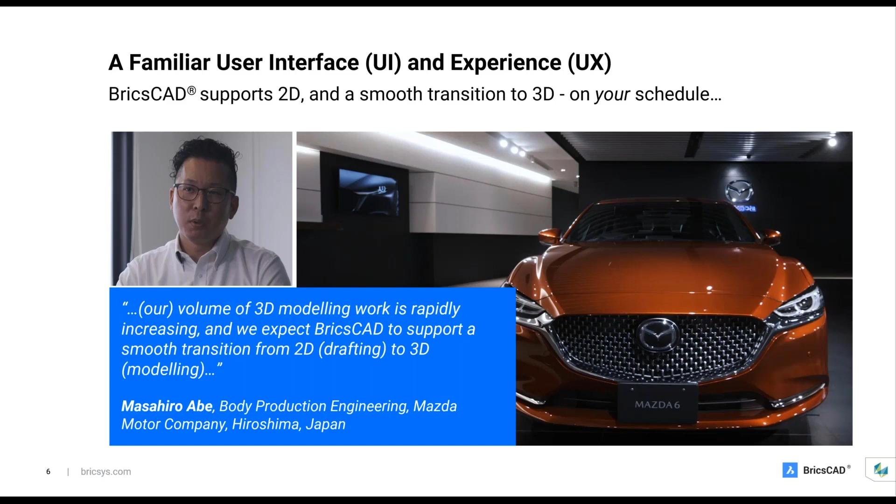Does this look familiar? Well, it goes much deeper than it looks. High compatibility means that AutoCAD users can be comfortable in BricsCAD in 1 hour and proficient in an afternoon. The user interface looks very familiar right out of the box, and you can modify it to suit your every whim and need. But perhaps more importantly, the user experience is the same. As my friend Robert Green says, never forget what you already know. The same workflows, the same terminology, the same support files, 100% compatible command structures. It's pretty amazing, and BricsCAD is exceptionally comfortable for everyone.

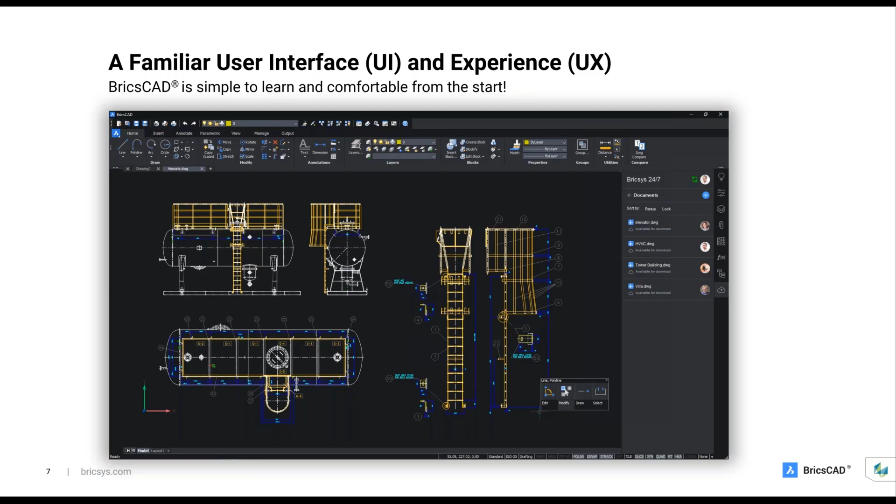Now, what are the folks at Mazda so excited about? Well, the fact that the BricsCAD product family supports 2D drafting, 3D modeling, building information modeling, and mechanical assembly design in one product with a single workflow. We call this full stack product BricsCAD Ultimate. The 30-day free trial of BricsCAD is BricsCAD Ultimate. So when you download and try BricsCAD, you're getting all the products in one package. Your trial installation becomes a full commercial license when you enter a valid license key.

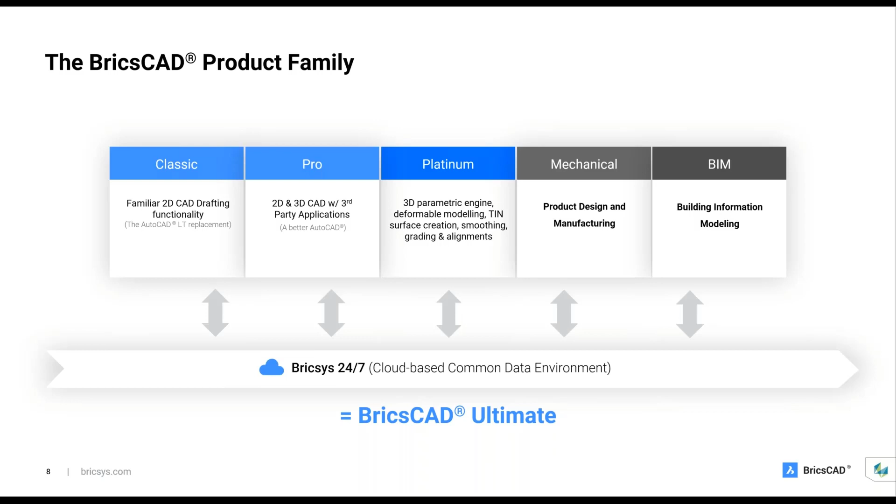And all editions of BricsCAD link directly to Bricsys 24/7, our cloud-based collaboration and data storage environment. There's an in-product communication panel for 24/7 in each one of the BricsCAD editions. From that panel, you can communicate directly with your colleagues, view, download, upload, and version files through the Bricsys 24/7 cloud service.

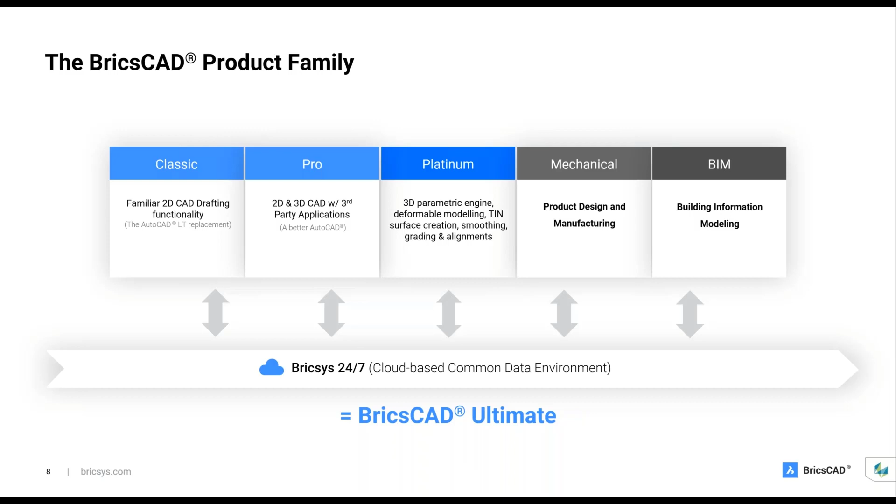When you leave this session today, we want you to remember 3 things. Here's the second thing: BricsCAD is a development platform. It's a modern and powerful CAD engine supporting over 400 world-class application products.

The BricsCAD runtime extension, BRX, is code compatible with Autodesk's AutoCAD runtime extension, ARX. This application programming interface lets developers write code in C++, C#, .NET, and Lisp. If you write applications for AutoCAD, you really need to check out BricsCAD's BRX. And if you use CAD applications, you really need to check out BricsCAD, as there are more than 400 industry-specific application programs on the BricsCAD App Store.

So let's hear from our next customer, Stageco of the Netherlands, and I'll ask Julie to come on after and tell you a little bit more about their use of BricsCAD.

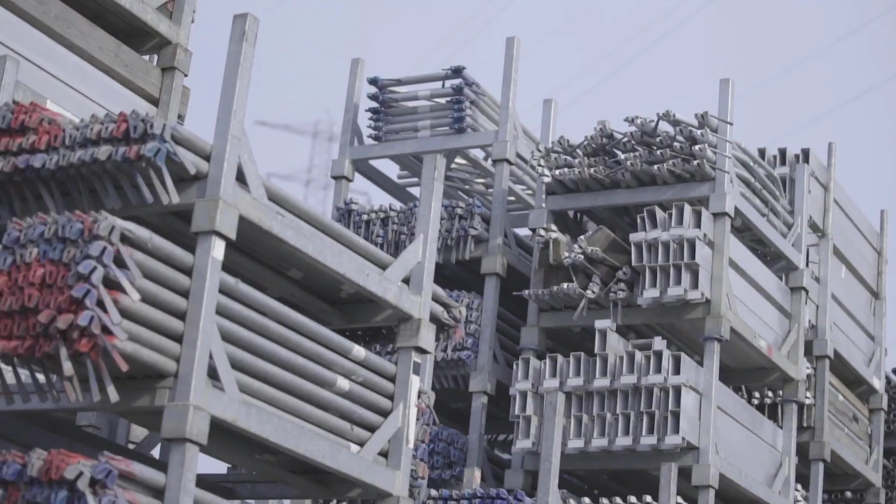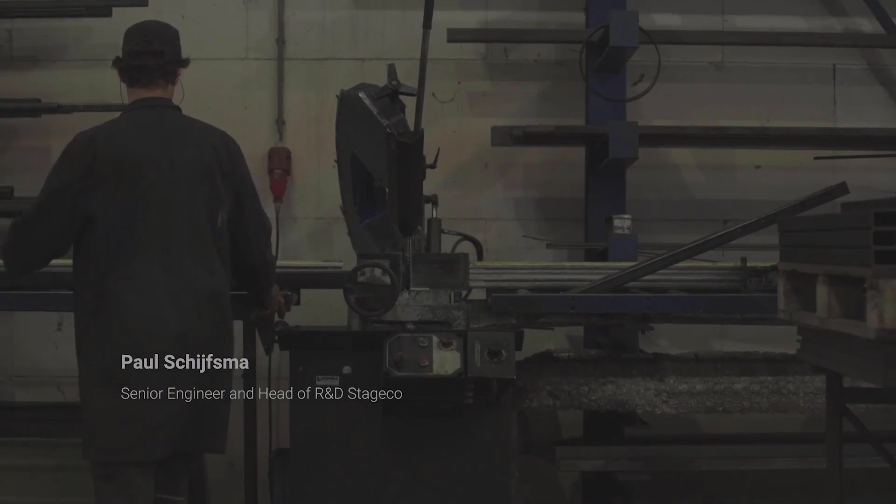My name is Paul Schijfsma. I'm Senior Engineer and Head of the R&D Department of Stageco Netherlands. We build stages for big tours and festivals. For a company like Stageco, it's very important to own your own software and CAD licenses, because there's so much relying on the drawings, there's so much relying on the whole CAD system. From just the simple drawings, which are the first indicator of what a construction is going to cost, until load lists and the drawings for the people who have to build the structure.

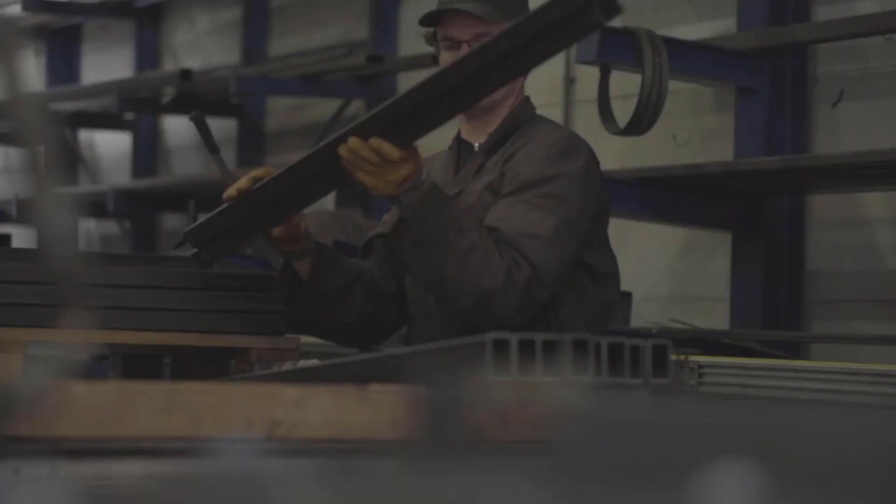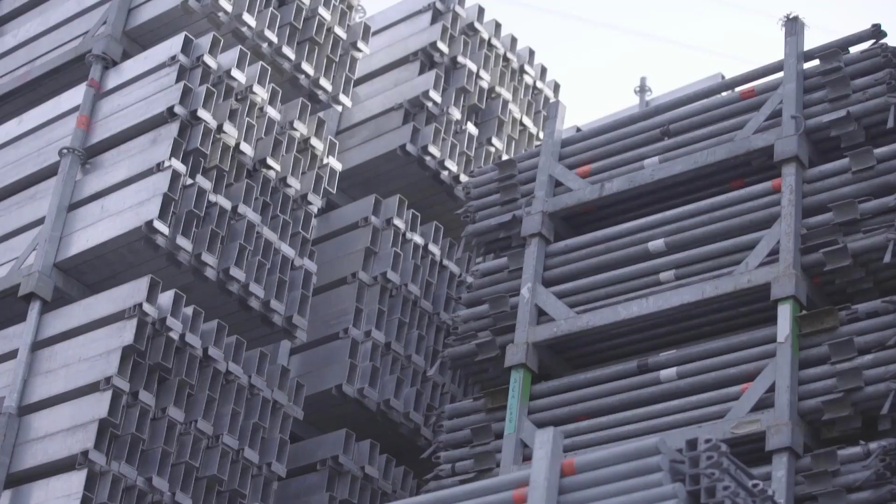BricsCAD is most important in our work because of its functionality, the speed in which it works, the speed in which you can see all the aspects of the drawings. Definitely a big time saver. We've had CAD programs in the past which were also DWG based, and when you have a large drawing, because we do pretty large constructions with a lot of parts, and when you then want to rotate or zoom in or zoom out, you just have to wait again and again.

And the structure is pretty open, the program is pretty open to make your own applications for your specific needs. Besides the speed that BricsCAD brought us, it also brings a big advantage in the Dutch event industry, because there's a company in Holland which has made a shell around BricsCAD, especially made for the event industry, which also has a lot of libraries, like libraries with light, with scaffolding, with PA, with video. So it makes it very easy to exchange drawings or to upfront see where problems are going to occur.

My name is Paul Schijfsma, but now I'm known as the guy who brought in BricsCAD at Stageco.

Here's what Paul Schijfsma, Senior Engineer and Head of R&D from Stageco, says about the power and application programs that run on BricsCAD. As he said, there is a company in Holland that makes a program for BricsCAD especially created for the events industry. It has libraries for lighting, scaffolding, PA, and video, so it makes it very easy for us to exchange drawings and upfront see where problems might occur in our design.

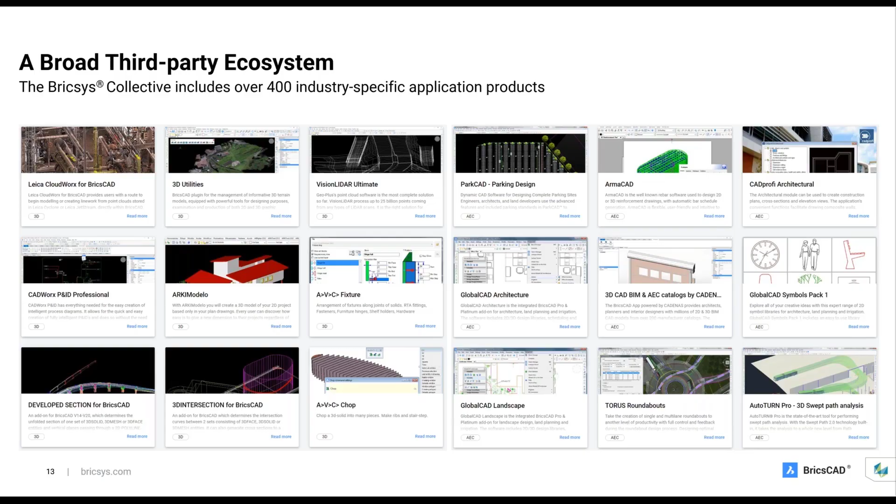When you leave this session today, we want you to remember three things. Here's the third thing: BricsCAD delivers an all-in-one workflow for 2D drafting, 3D modeling, building information modeling, and mechanical design. This means a manufacturer of architectural building products doesn't need to change their software to integrate BIM and manufacturing. Intrigued? Meet our customer, Prototyp.

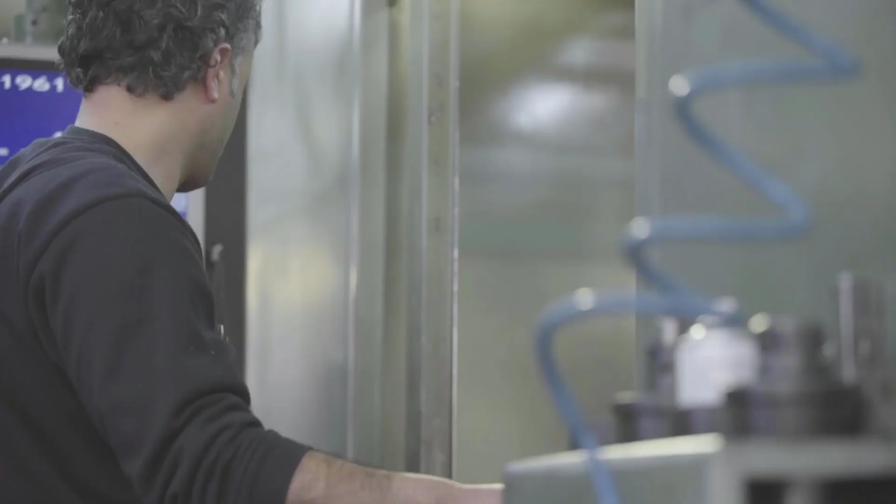My name is Christo Genchev and I'm Managing Director of Prototyp, a facade engineering office. BricsCAD covers all of 2D and almost all of the 3D tools you need. It combines features from almost all software packages that we use, and integrates them in one software product.

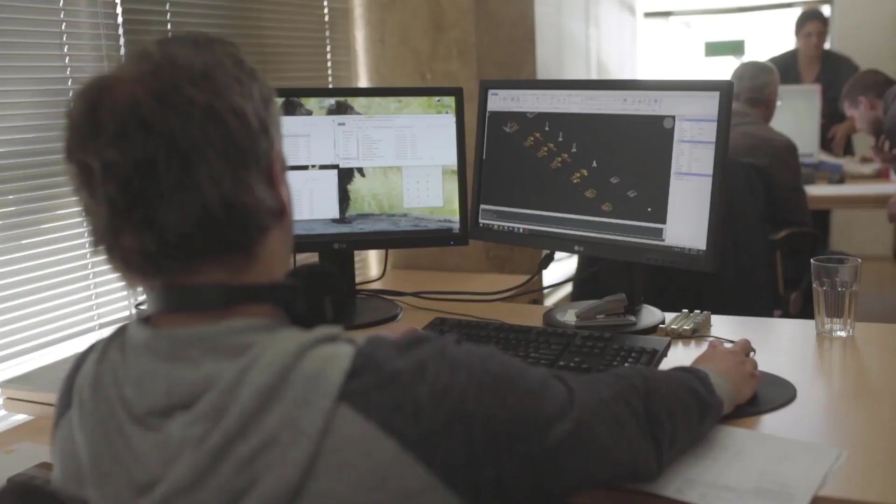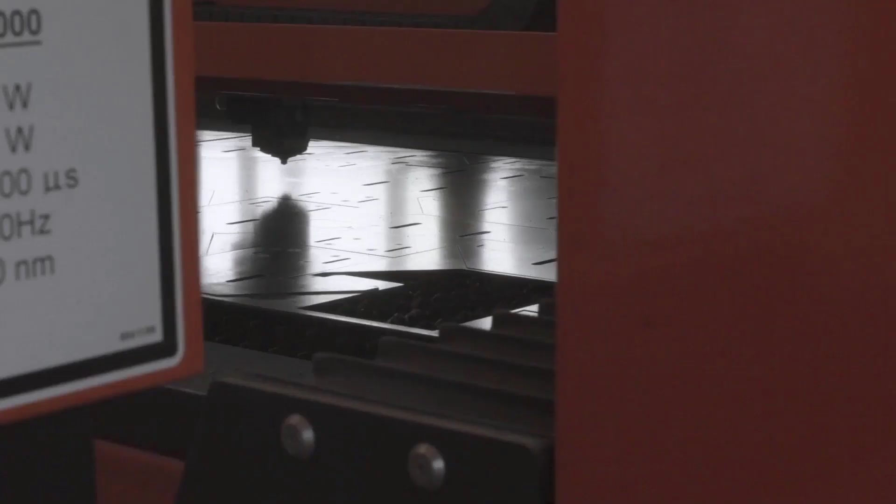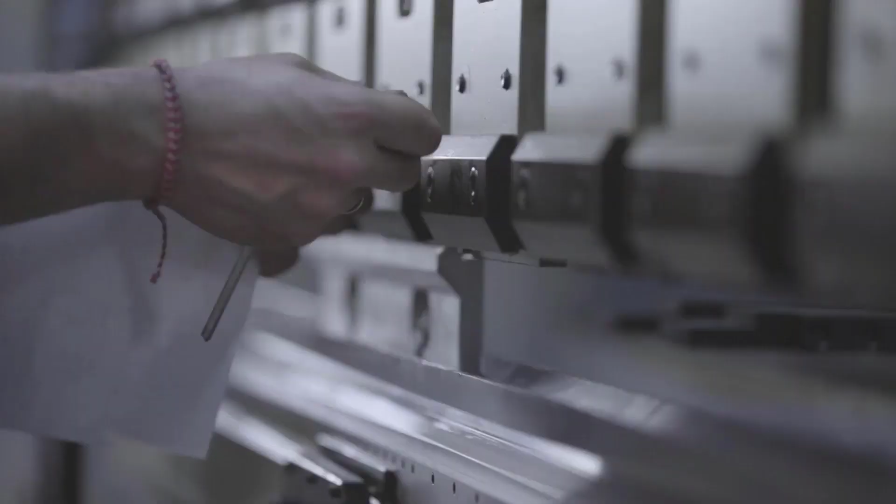It uses a very widespread data format, DWG, which is the de facto standard in the CAD industry. And since we work in the construction industry, you're able to create BIM models, which is something we need more and more often in our job. But what distinguishes BricsCAD is, of course, the sheet metal module, which is very helpful.

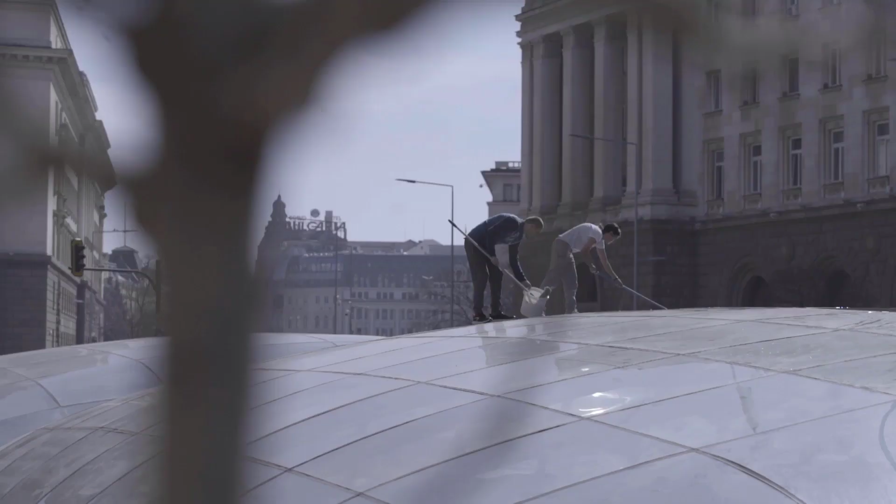Engineers are not determined by the tool they're using; they're determined by what they know. In some cases the 3D path is more productive, and in some cases the 2D path is more productive. If you're an engineer used to working in 2D, it's much easier to start working in 3D with BricsCAD than with any other tool, because you follow the same pattern. This is one of the good things, that you keep everything in one format.

We want to be convinced every year by our supplier why to buy the new one. It's a more equal partnership with the provider of something as important as your software. This is why we like to have software that we really purchase.

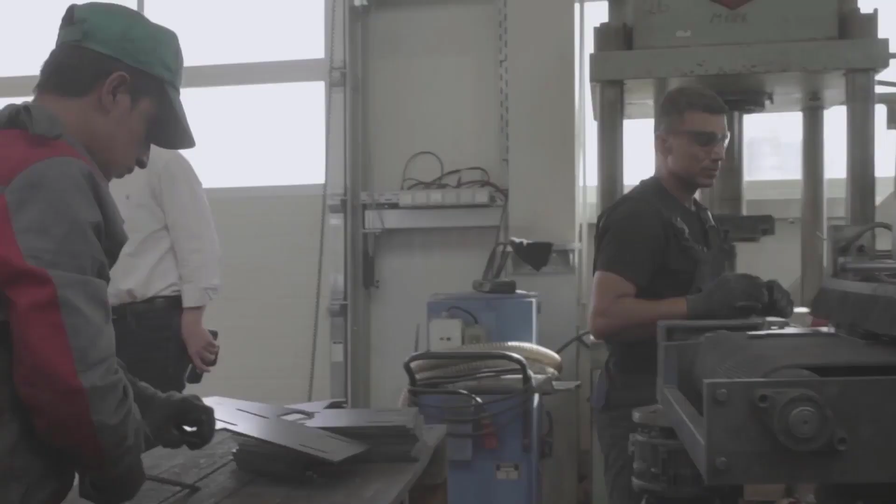Hristo's team at Prototyp uses 85 licenses of BricsCAD Pro, Platinum, and Ultimate. As I said earlier, BricsCAD Ultimate includes both BIM and mechanical workflows. So imagine producing manufacturing-ready documentation from a 3D BIM model - you can with BricsCAD Ultimate.

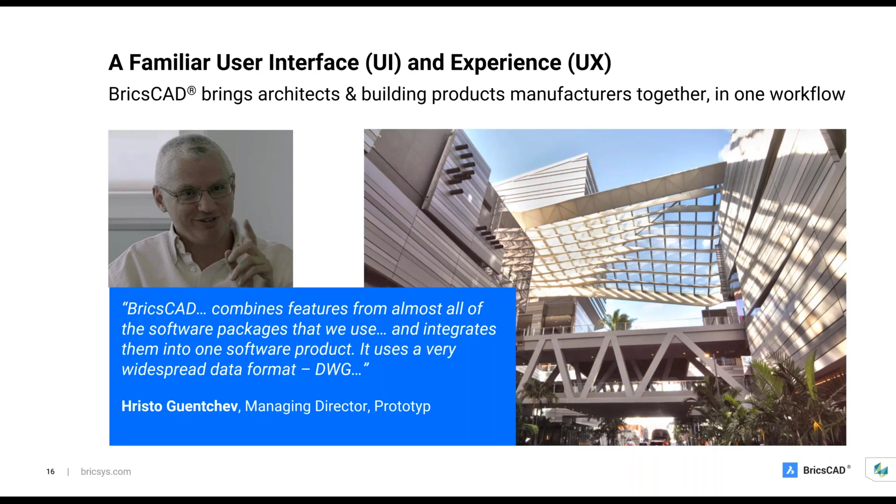One more thing, something Hristo said that links back to the earlier story. I'll quote him: in some cases the 3D path is more productive, and in some cases the 2D path is more productive. If you're an engineer used to working in 2D, it's much easier to start working in 3D with BricsCAD than with any other tool, because you follow the same intuitive pattern. High praise indeed. And speaking of BIM, since Mr. Guentchev mentioned it,

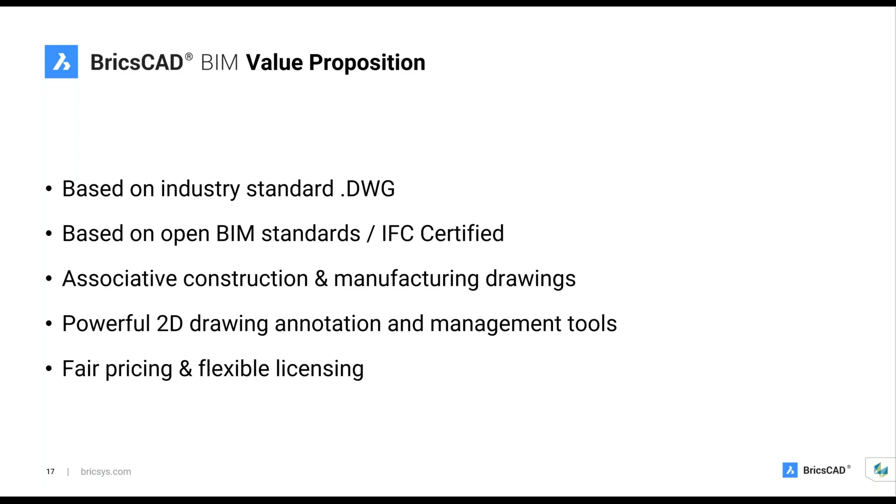we offer an alternative building information modeling workflow that's turning heads today in the industry. Our workflow is based on industry standard DWG for interoperability and lower training costs. We're based on open BIM standards and IFC certified by Building Smart International. Now you can create associative construction and manufacturing drawings with the most complete 2D drafting toolset ever, and potentially best of all, fair pricing and the most flexible licensing in the industry today.

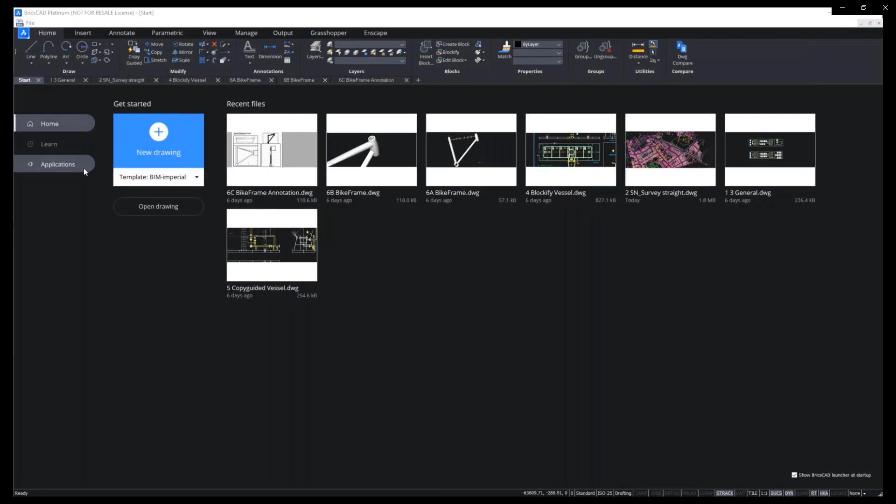BricsCAD is highly compatible with the user interface and user experience that AutoCAD users know and love, so it's easy to learn. It comes predefined with workspaces for drafting, modeling, mechanical design, and BIM. The user interface looks very familiar, and it delivers all the information you need to be productive right away.

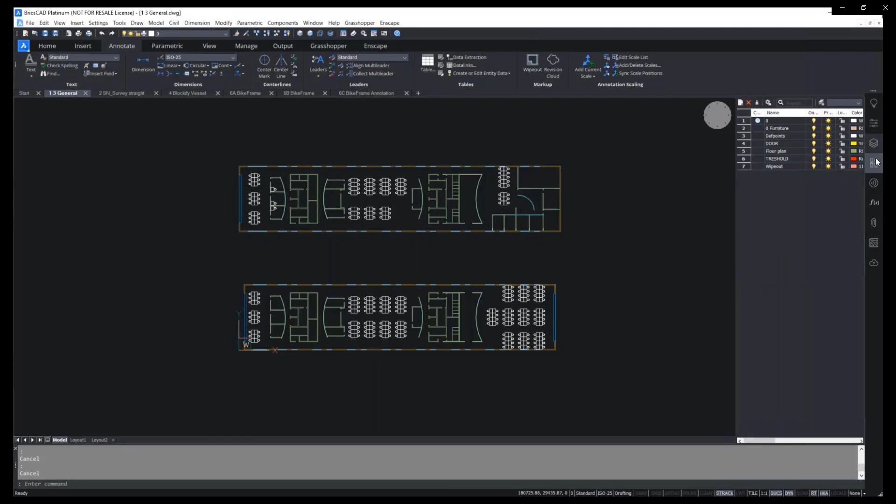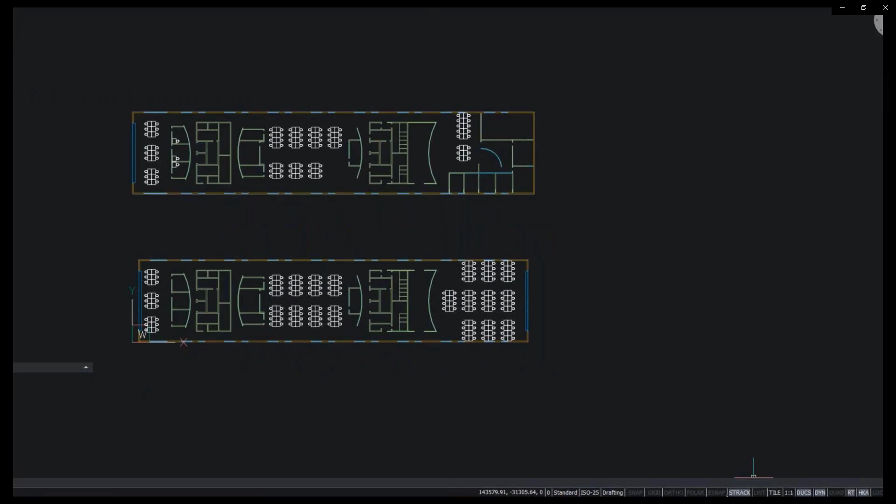Dockable panels by default are displayed along the right side edge for properties, layers, customized tool palettes, our 24/7 cloud service, and more. The command prompt layout is fully adjustable to meet your working style - it can even float. The layout tabs are where you'd expect, and we've added a layout manager to help you create and organize your layout tabs. BricsCAD's familiar status bar lets you control those workspaces, as well as tracking and snap settings and much more.

Now here's the most important part of the BricsCAD user experience: command names, aliases, and system variables are the same in BricsCAD as they are in AutoCAD, so you don't have to relearn anything to use BricsCAD today.

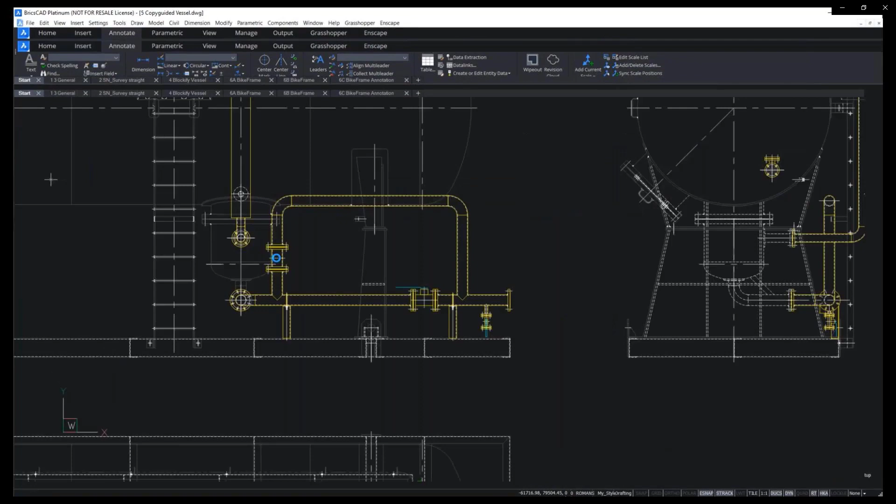And your drawings are totally compatible. Just open them and go. Remember, they are DWGs. There's no need to change your drawing templates, blocks, page setups, printer setups, or sheet set layouts to move to BricsCAD. They are all fully compatible, so reuse those customizations you've already created. You never need to start from scratch when you move to BricsCAD.

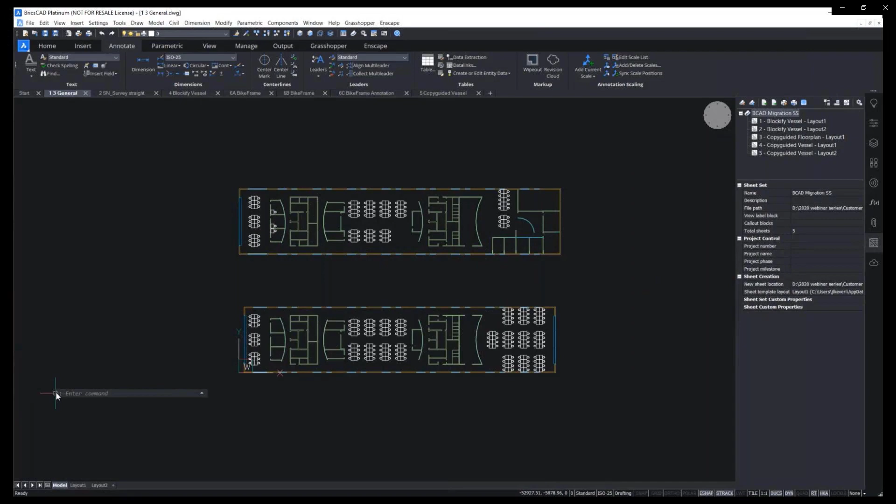But BricsCAD is more than just compatible with AutoCAD. BricsCAD offers unique tools to help you do more in less time, including machine learning and AI-based workflows. The BricsCAD Quad Cursor menu is an AI-based tool palette and a heads-up display right at your cursor. It predicts the command you'll likely need next based on the way you use BricsCAD.

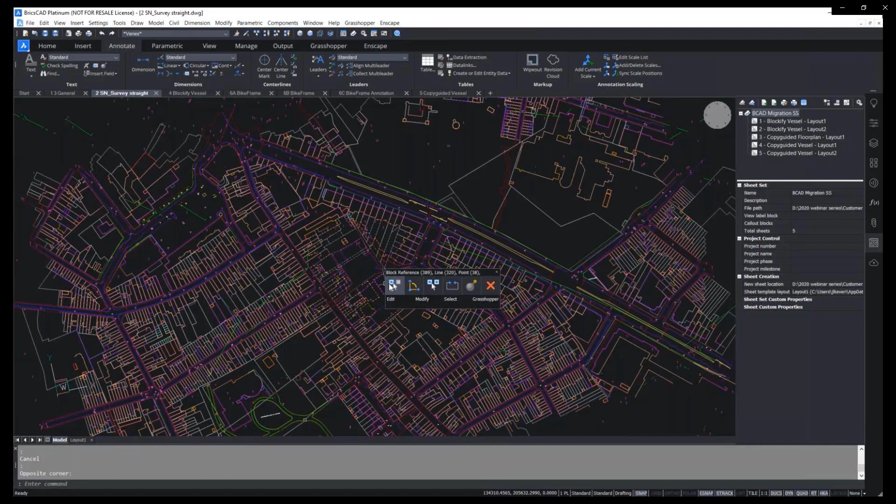Since the Quad gives you all the commands you need automatically, use the clean screen mode to maximize your drawing area.

BricsCAD offers a 2D dynamic UCS, so it's never been easier to draw 2D entities while keeping track of true north.

The nearest distance feature shows the distance between any two entities. Want to change the distance? Just type in a new value and you've implied a move command.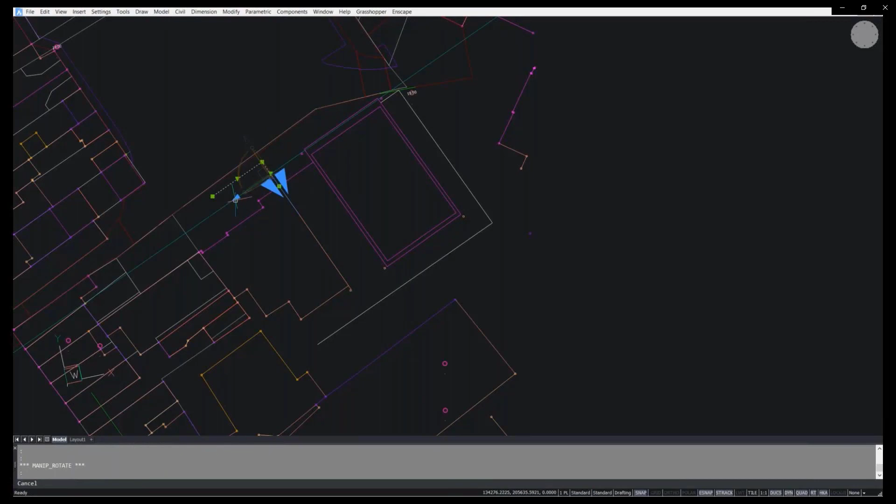Need to rotate, copy, move, or mirror drawing elements? Hold the pick button down a bit longer and the manipulator appears. It offers all the standard copy and displacement commands without any command input. The manipulator can be used with both 2D entities and 3D solids.

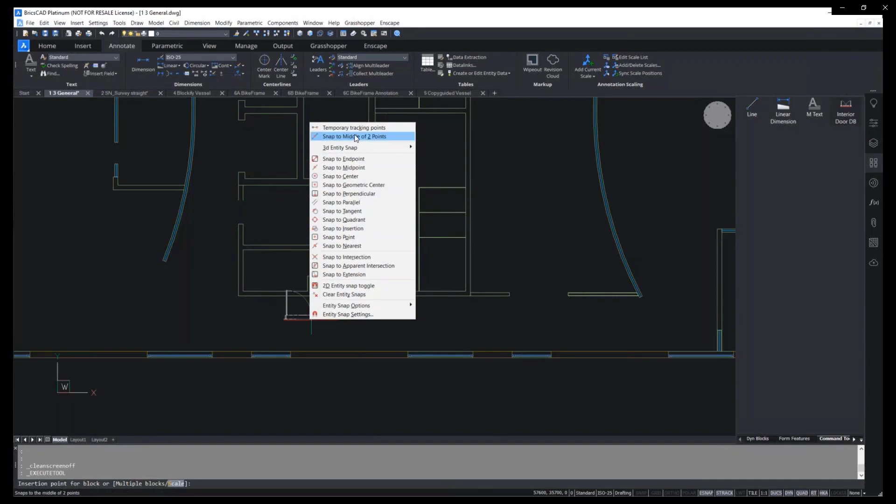You can use dynamic blocks created in AutoCAD directly inside of BricsCAD. Import and access your block libraries from BricsCAD's tool palette panels, drag them into your drawings, and place them anywhere you want. Then you can stretch or control dynamic block visibility states just as they were defined in AutoCAD.

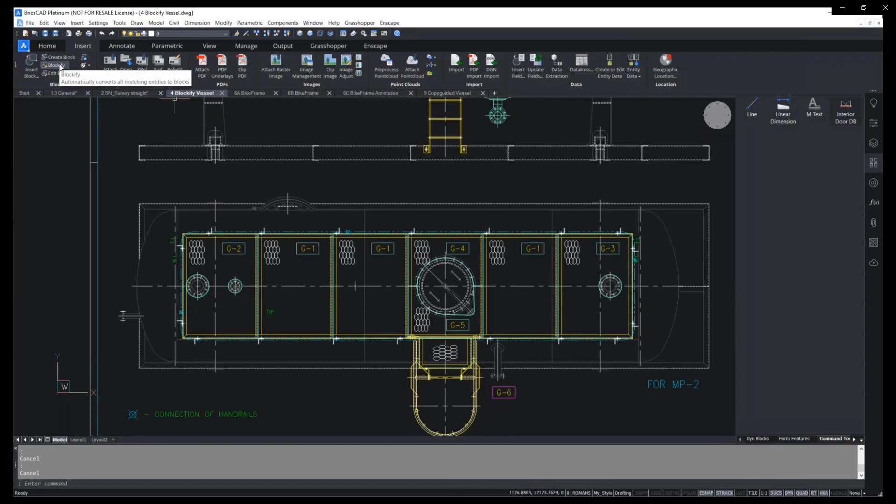Another BricsCAD AI feature is Blockify. It helps you organize and create the most efficient drawings possible in seconds. Here, this L bracket was created as 12 separate entities and copied across this drawing many times.

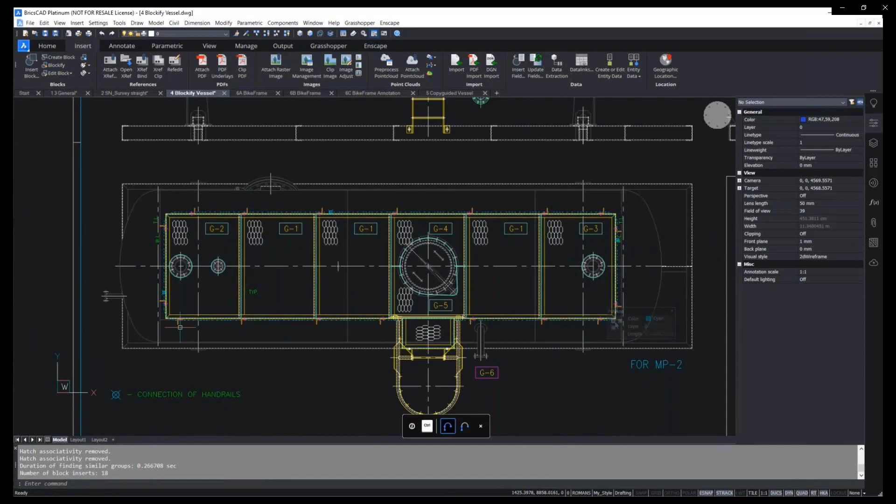With Blockify, just window select those entities. Blockify will scan the block database to see if there are any existing blocks that match your selection. If so, it will use that block to replace all the individual entities. If not, it will create a new block definition and use it to replace the repeating geometry.

The power of AI can also help you create smarter drawings. The copy guided command analyzes the geometry around your selection set and creates a set of guide curves, represented here by those blue arrows. Then it automatically aligns those entities to relevant geometry as they are copied.

With copy guided, there's no need to zoom in or use object snaps. You don't even need to trim lines after the copy - BricsCAD and copy guided do that automatically. If we decide we don't want one of the valves, simply use copy guided again with the geometry you want to replace it with, and it's gone. Copying geometry to a new location has never been easier or more accurate.

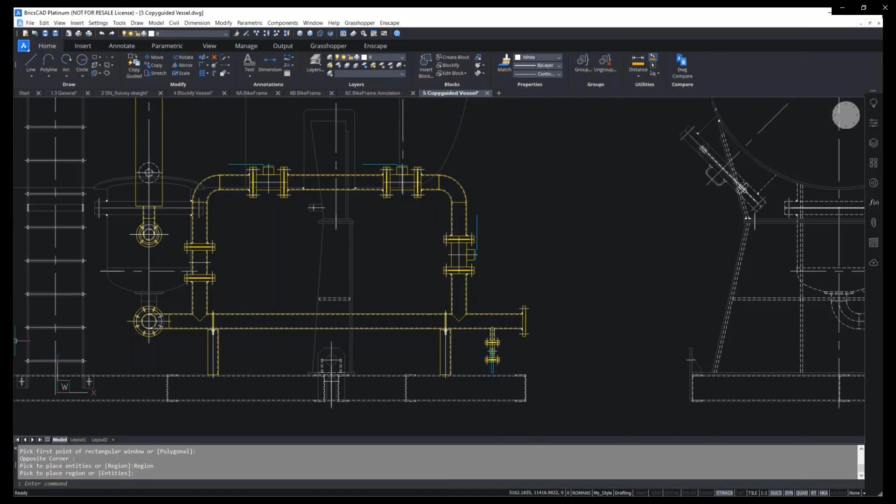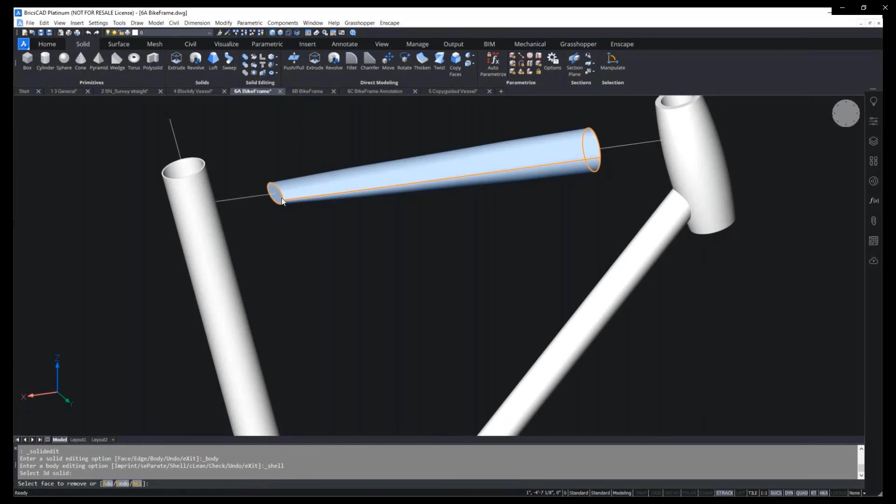Changing from the drafting workspace to the modeling workspace provides easy access to 3D modeling tools. BricsCAD offers intuitive push-pull direct modeling for creating and editing solids and surfaces. Direct modeling is much more flexible than conventional history-based modelers. If you're familiar with 3D modeling, you'll be right at home modeling in BricsCAD.

You can start with primitive shapes, 2D profiles, or imported geometry. Anything you can create can be extruded, swept, or revolved into shapes using commands and workflows you already know. And because all the BricsCAD editions are built on one common platform, these tools are consistent across the editions.

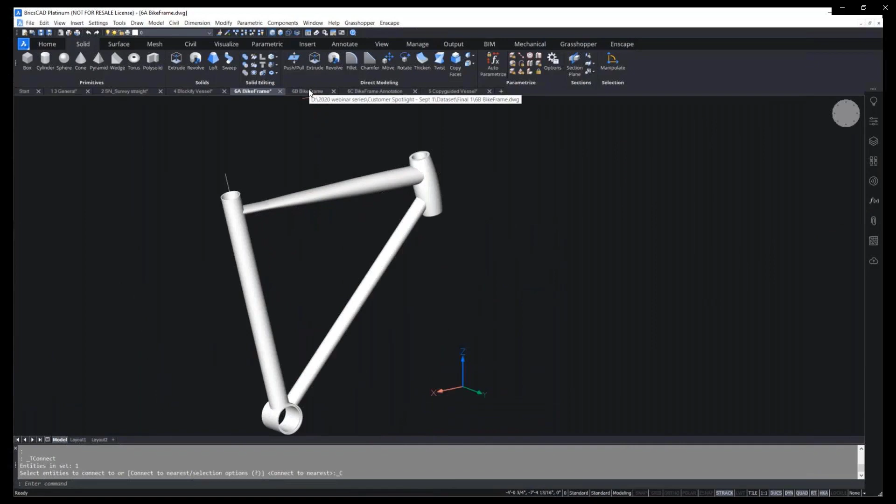If you're new to 3D, you'll find that BricsCAD's direct modeling approach works intuitively, like digital clay with full CAD accuracy. Add the power of BricsCAD's 3D constraint engine and the import-export capabilities of the BricsCAD Communicator add-on, and there's nothing you can't create in BricsCAD.

With Communicator, you can import and export the top MCAD neutral and native file formats such as STEP, IGES, CATIA, Inventor, and SolidWorks, to name just a few.

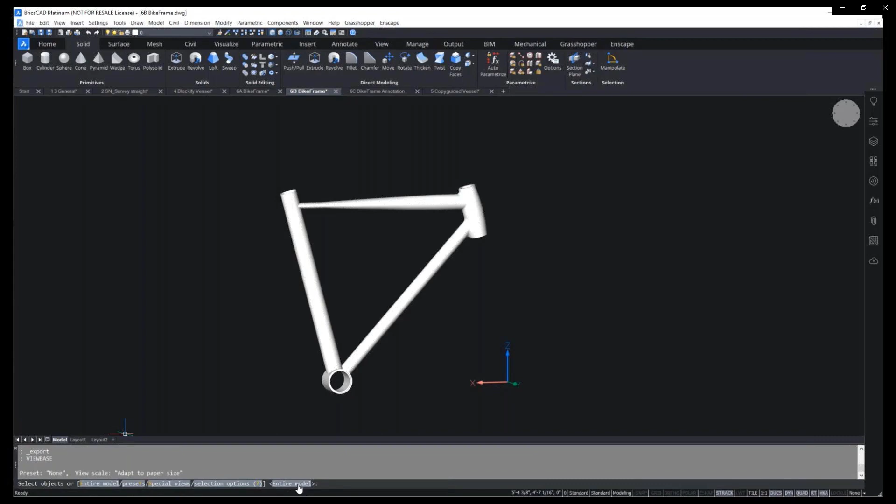If you're modeling in 3D, you'll need a reliable way to create 2D detail drawings from your 3D creations. BricsCAD generates fully associative drawing views directly from your model, and you have total control over the layout and style of the views you generate, so you can produce sheets like this.

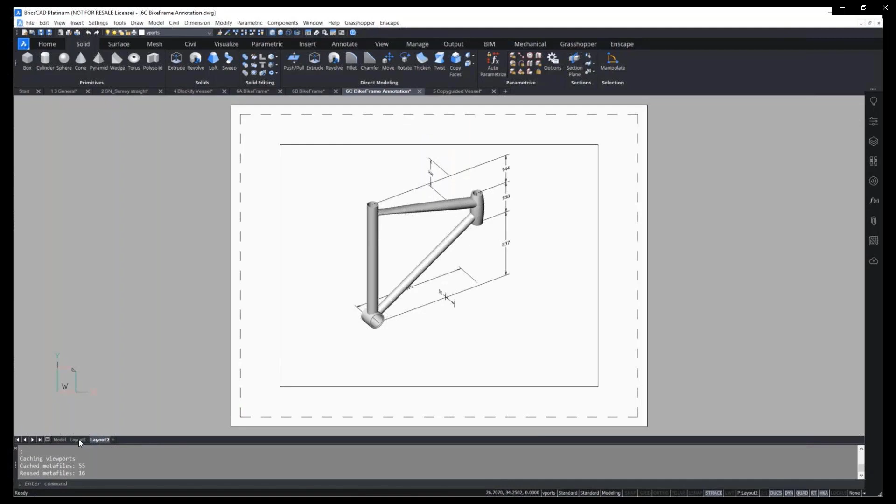BricsCAD can also generate fast draft quality views that can be regenerated as full detail views using all the cores in your computer CPU. Now that's modern CAD performance. But don't believe me? Try it for yourself.

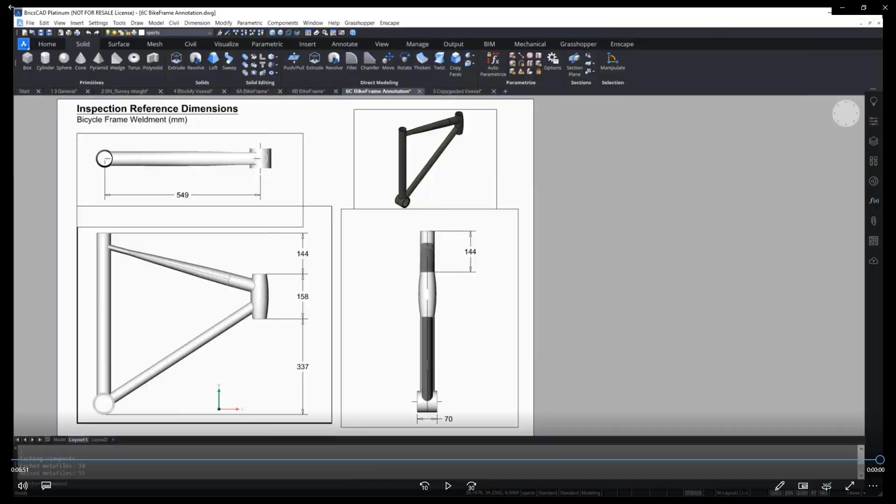Julie asked Don if he wanted to talk more about the compatibility of BricsCAD. Don agreed, then paused to get his screen back.

Robert will talk more about this in a few minutes, but it's important to note that BricsCAD is not only visually compatible with your current CAD solution, but also based on the current DWG standard, the same one as AutoCAD 2021. Files just open and save normally.

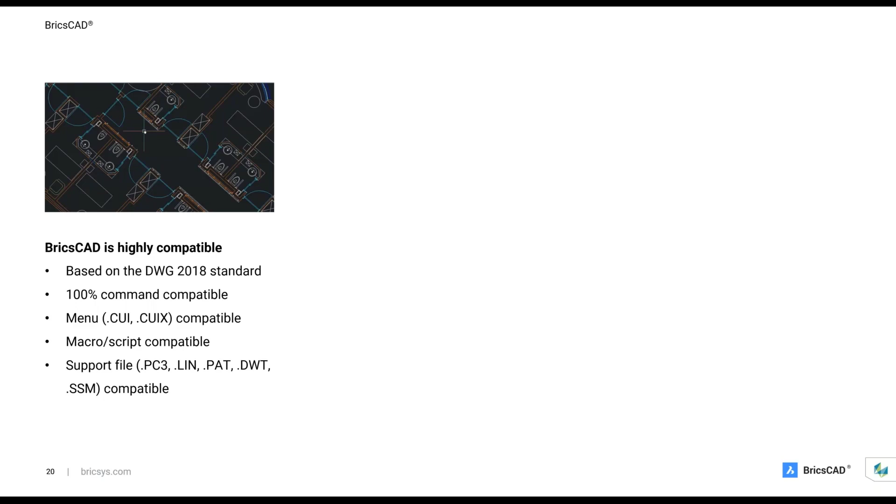We're part of the Open Design Alliance, a 1,200 strong member consortium that ensures there's always access to the intellectual property stored in the drawing files your company creates. We give you real choice: 100% command compatible, menu compatible, macro and script compatible, and as Robert will discuss, all of your support files from your current AutoCAD installation just load in BricsCAD.

Julie mentioned that we can actually use all the cores in your CPU. Think about that—CAD is intrinsically single-threaded. However, BricsCAD supports multi-threaded, multi-processor operations in specific areas to really speed product performance for file loads, drawing generation, section view generation and refinement, mass properties calculations, rendering, and other computationally intensive tasks.

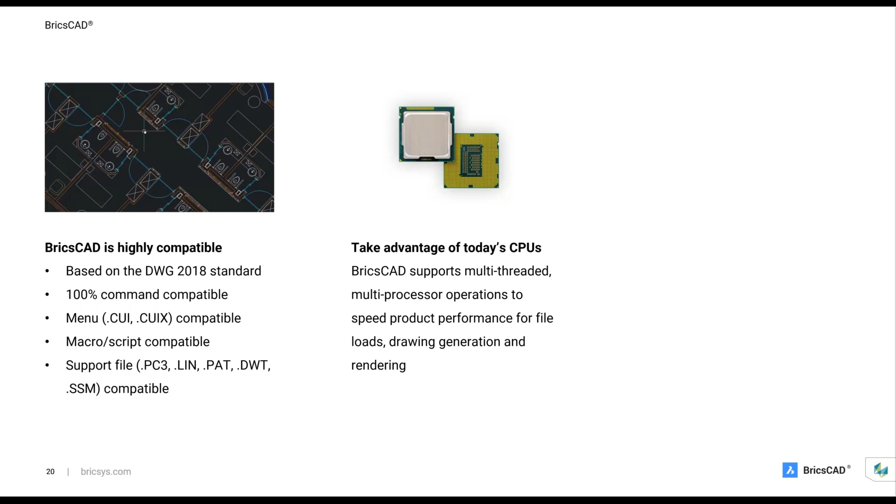And then finally, BricsCAD leverages the power of artificial intelligence. This whole AI thing is really overplayed sometimes, but we truly make use of AI through machine learning techniques to help automate and streamline all those laborious tasks you have to perform daily. We let you create more accurate designs faster with fewer keystrokes, and that's what productivity is all about—that's what modern CAD platforms deliver.

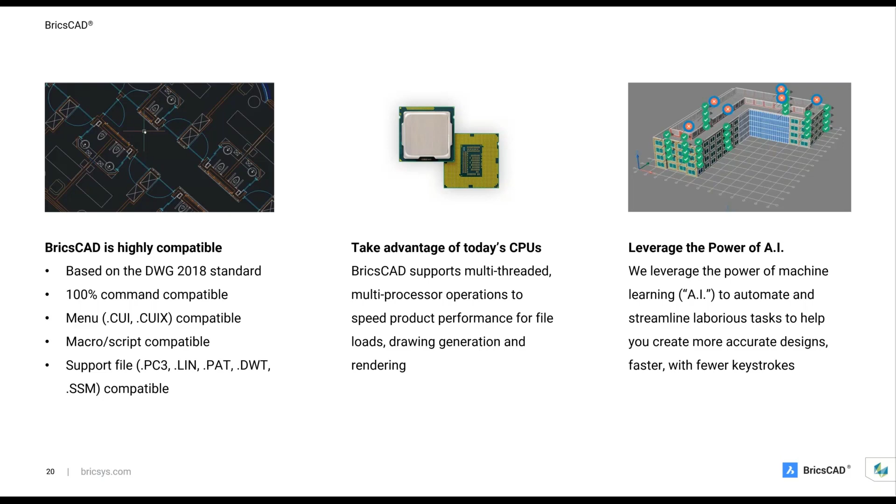We like to say that whatever you do, BricsCAD can help you do it better and faster for less money.

All right, I'm going to switch over to my colleague, Robert Green, and BricsCAD customer and CAD manager, Vince Venus. They're going to discuss the migration to BricsCAD at Gas Liquids Engineering Limited in Alberta, Canada.

I'd like to thank my guest, Vince Venus. He's a CAD manager in Alberta, Canada, and they're undertaking the move to BricsCAD. Vince, could you briefly introduce yourself and tell us who you work for and your title? Sure, my name is Vince Venus, and I'm the CAD manager at Gas Liquids Engineering Limited in Calgary, Alberta.

I've got over 30 years of experience in the industry and started out on AutoCAD 9. I've had as many as 100 designers in our drafting department at one point, which was a challenge. The company I work for is a privately owned engineering firm, currently comprised of about 230 or so engineers and designers, and we provide regional, international engineering from our Calgary offices—we've been doing that since 1987. We also deal with refrigeration, gas processing, power generation, liquids fractionation, and stuff like that.

The company we worked with is called Subsea 7. They're headquartered out of Aberdeen, Scotland, and they do underwater oil and gas facilities management. I was able to visit with them at their Aberdeen and Houston locations to get BricsCAD working for them.

Next slide, please. To undertake this process, we utilized what we like to call our proof of concept service strategy. What we do is familiarize the company's users with BricsCAD so they don't perceive it as a threat. They see exactly how compatible and friendly it is, as Julie has shown you. We explore licensing options, we perform migration of custom assets so that BricsCAD appears like your old CAD system, and then we work with them to develop implementation, deployment, and learning strategies. What I've learned over the years as a CAD manager is that success is never an accident. It's the result of having a strategy.

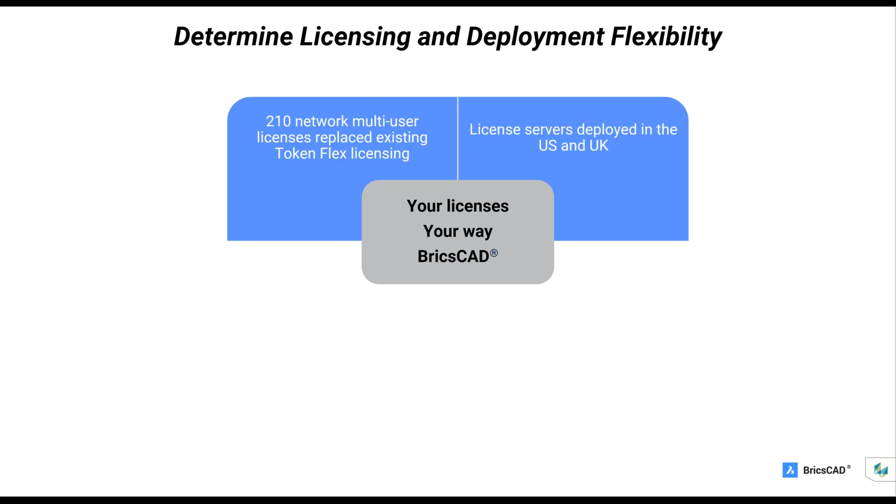In Subsea 7's case, we were able to roll out 210 network multi-user licenses to replace their existing token flex system, saving them a lot of money in the process. We were able to get their license servers deployed for redundancy, both in the US and United Kingdom, and then create a standard deployment MSI and add-on package with all their custom files to be pushed via their SCCM IT push control strategy. This entire package was about 420 megabytes in size, so you can imagine how quickly that deploys across your network. We created scripts to provide a silent install experience, so zero user interaction was required. Licenses were initialized, the users never had to do anything, BricsCAD simply installed at their next startup.

Now, how long did it take us to do all this?

The actual technical implementation, testing, and validation time was 7 calendar days. Most of this was done remotely, but I did visit them at their Houston facility for 2 days for final testing. The rest of the time was coordination, dealing with purchasing, contracts, and scheduling the deployment around existing projects. That's a very rapid way to deploy software, and I'm very proud of that result. It was a pleasure working with them.

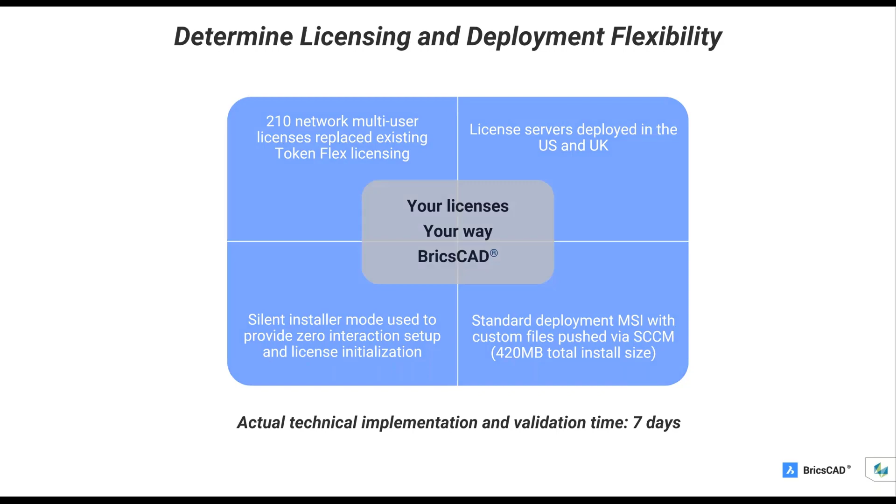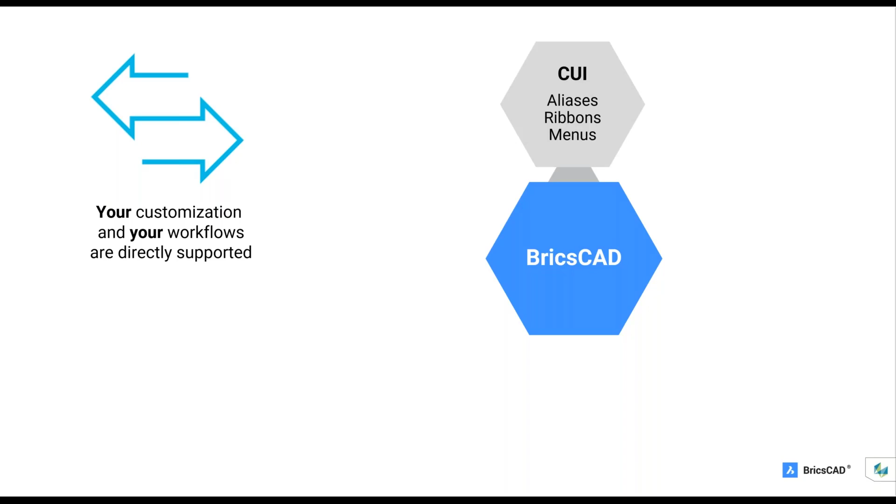We understand that you're not simply going to switch to BricsCAD unless your customization and custom workflows come over with it. So we make sure we can bring over your CUIs, your tool palettes, your LISP routines, your sheet sets, your templates, all the way up to your plotter and page setup configurations.

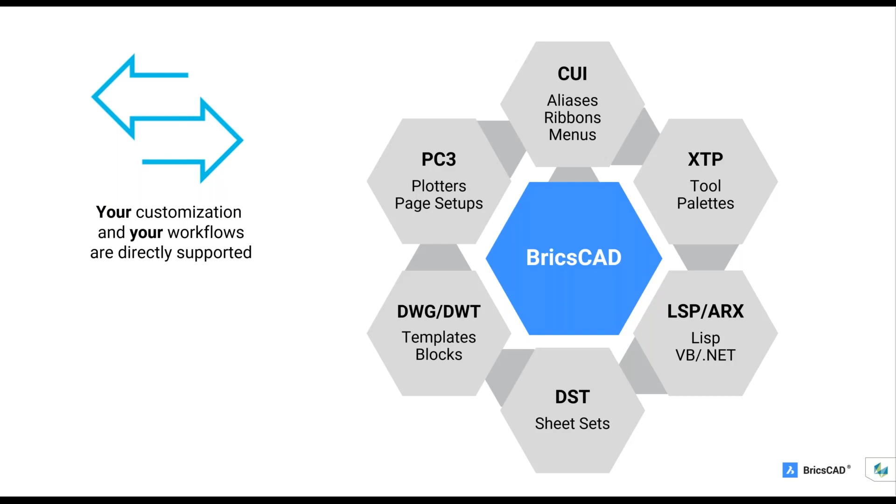The goal is your users should use BricsCAD the way they've used their existing system. If we do that in our proof of concept validation, you can be confident it will work. We say that if you can use AutoCAD, you can use BricsCAD because everything is so familiar, even your custom components and workflows.

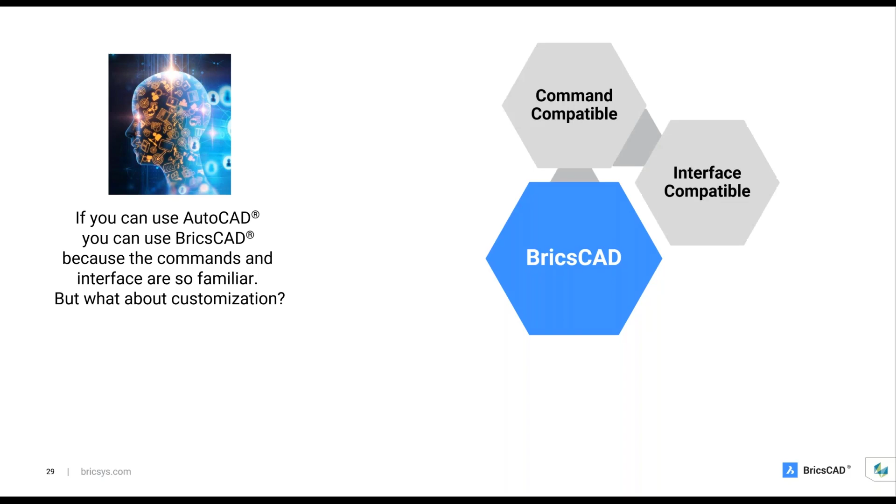So here's what our approach looks like. We use the command-compatible language, a compatible interface, and we bring over your custom tools. This allows us to achieve what we like to call muscle memory compatibility, so your users simply sit down and start using BricsCAD the way they have always used their existing CAD system. This means they train in hours, not days or weeks. In fact, I train a lot of people over a lunch break.

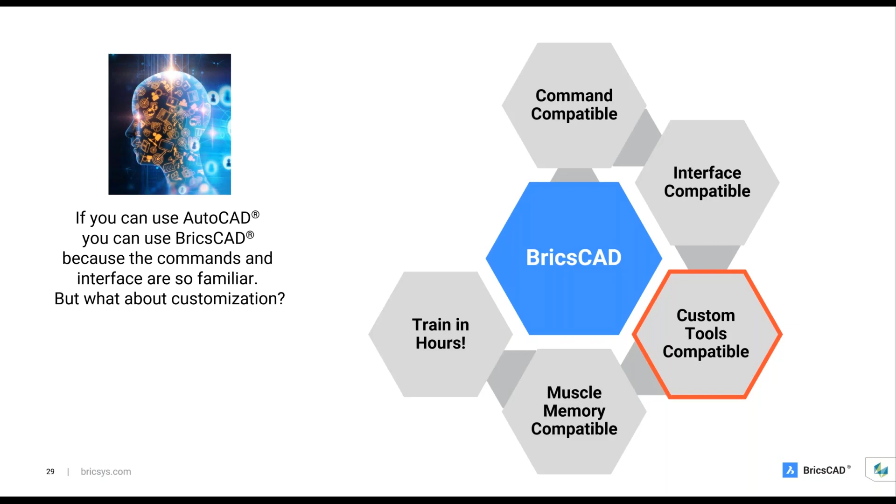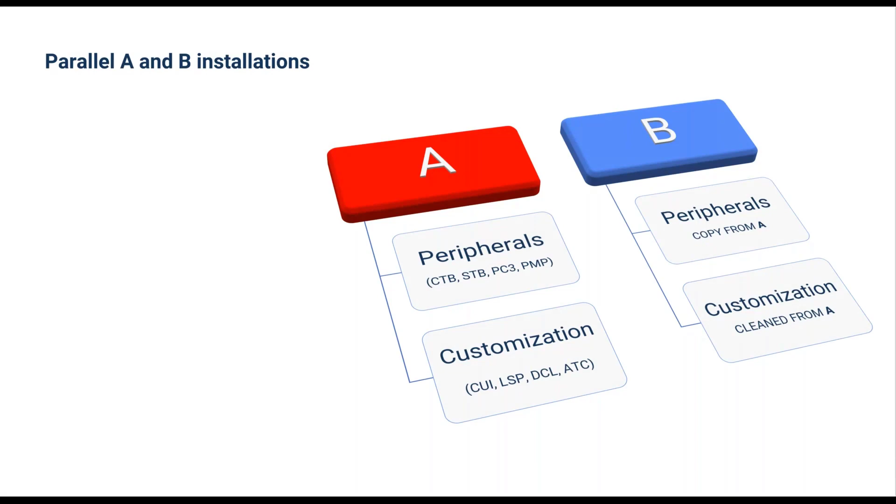The approach we use is a parallel installation that allows us to compare A to B, so we can validate our proof of concept easily by switching between the systems. We actually test BricsCAD while you're running your old system. We establish all the same network folders, migrate your customization, replicate your peripherals, and achieve a clean, minimal migration that gives you a fresh start with BricsCAD.

It's really that simple. We also understand that part of this experience is building a training framework, how your users are going to be able to accept and explore and start to use BricsCAD and get up to speed quickly. Here's how we do it.

We always stress the familiar interface. We use your actual DWG files in actual project context, using your actual standards and custom workflows. Our training concepts are not based in theory. It's not 'here's how you might do this,' it's 'here's how you will do it,' because we've migrated all your settings over and we're making BricsCAD look like your existing system. That's proof of concept.

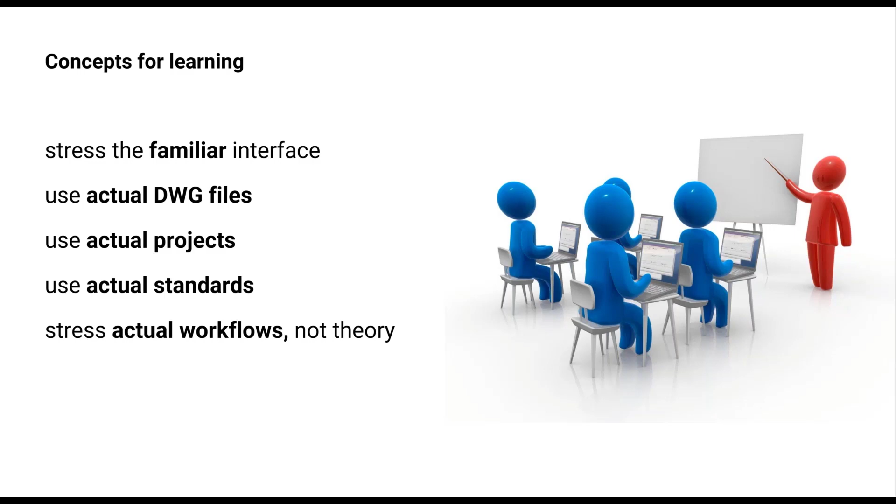So what's the result of all of this? It's a really high return on your investment. Why? First of all, BricsCAD is very affordable in the first place, and with our network and perpetual licensing schemes, it's even more affordable. We'll bring over your custom assets, which lowers your training costs, and due to our extreme compactness and rapid deployment capabilities, we'll lower your IT costs too. It all adds up to a great return on investment with BricsCAD.

If you dig in and explore the possibilities of BricsCAD, I think you'll have to agree with me: it really is easy to go from A to B. You really can switch from your existing CAD system to BricsCAD. Let us show you how, and let us help you.